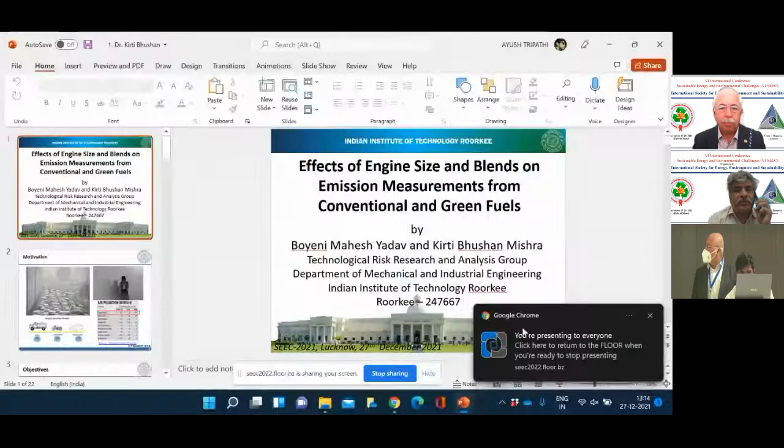I hope I am audible to all of you. I hope I am audible to all of you.

Okay, so this is the way I usually deliver my lectures at IIT Roorkee. Students always say that I have a good voice to present lectures without any microphone, so I'm following the same technique here. First of all, thanks a lot for having me here. This is the third time I'm participating in this prestigious conference.

And the work which I'm going to present today will be a sequel to the earlier presentations. Those who were present in the last two conferences can recall that the work we are doing is focusing mainly on what happens when we use conventional as well as green fuels with some blends, and observe their performance and emission parameters in a laboratory scale engine and in a realistic size engine.

So until last year, we were able to perform some experiments with these fuel blends at our laboratory in IIT Roorkee, which has a small engine. This year only, one of my MTech students, Boyeni Mahesh Yadav, took this initiative and went to a company where we have a larger size engine, and there we tested the same fuel blends.

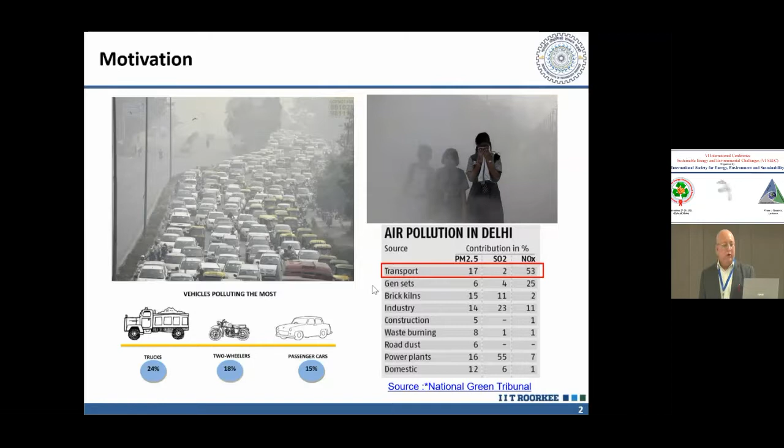The fuel blends which we have chosen belong to conventional fuels like diesel and green fuels like biodiesel, ethanol, methanol, and at least one cetane improver.

The objective is very clear: we want to reduce emission without compromising efficiency. So what we foresee is that these fuel blends can be immediately utilized in the existing vehicles present on road, and they can also be seen as one of the possible alternative fuels in process industries.

So here what we see is typical kinds of biodiesel. The feedstock were listed in the earlier presentation also, and here we have maintained that uniformity, took waste cooking oil as our main biodiesel fuel, together with ethanol and methanol, and one of the cetane improvers. We picked up DTBP as one of the cetane improvers, and we varied the contents the same way as in our laboratory scale.

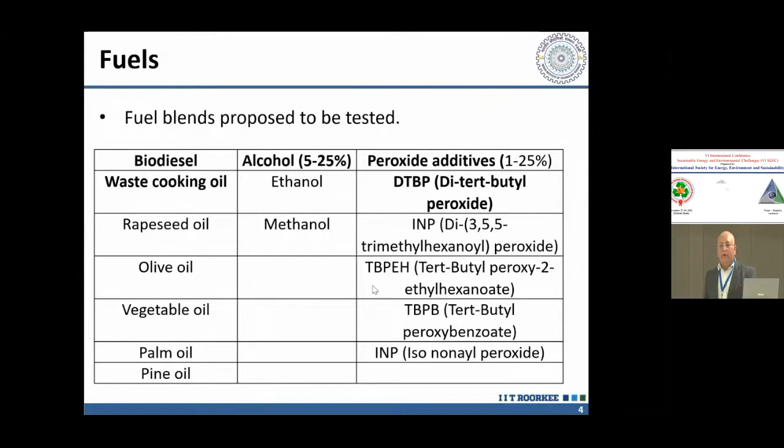So why does engine size matter? This is a three-wheeler having a capacity of 5 kilowatt. This is an all-terrain vehicle having a capacity of 15 kilowatt, a tractor with 25, and a small goods carrier which has a capacity of about 60 kilowatt.

So when we look at the laboratory scale engine, this is something like this. What we did in the present work is extend our testing up to this range of engine capacity, 15 kilowatt. This is a schematic of the laboratory scale engine, which has a capacity of 4 kilowatt, single cylinder, 611 cc.

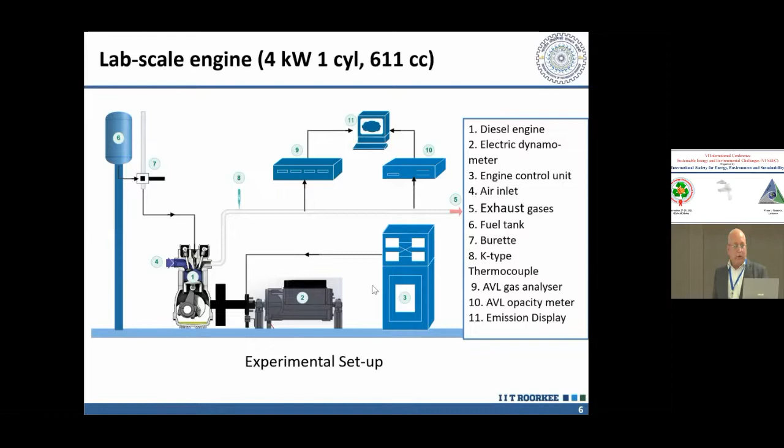This is just a recap of what we did earlier. We measured NOx, CO, and smoke characteristics in the laboratory size engine. What we found out is that the ternary blend, having biodiesel at 93.2%, DTBP 1.8%, and ethanol 5%, gives us the best results, comprising 6.3% NOx reduction, 52.4% CO reduction, 49.2% hydrocarbon reduction, and 45% smoke reduction.

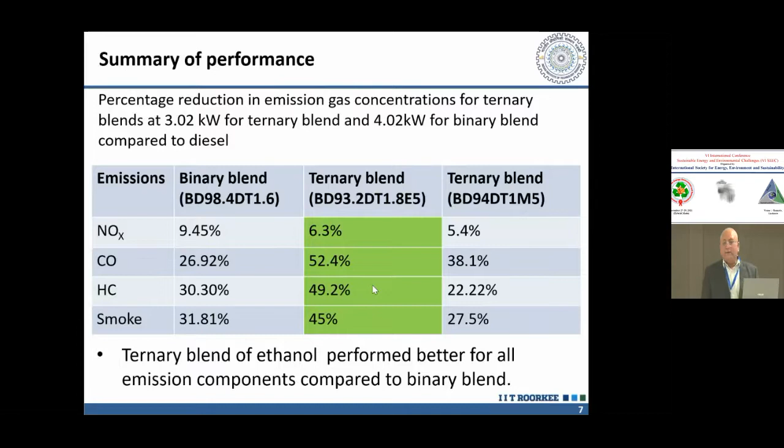So we targeted testing these fuel blends in a heavy size engine to see what comes out. We contacted one of the companies located in Pune, Apex Innovation, and they have a 22 kilowatt double cylinder turbocharged engine where we tested our fuels.

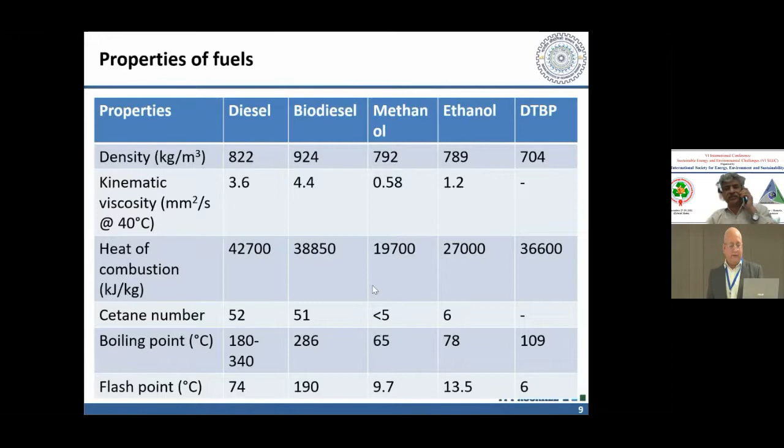This is our cetane improver, DTBP, which has a chemical structure something like this. We want to improve the cetane numbers of diesel and biodiesel by adding a small quantity of DTBP together with ethanol or methanol. This particular peroxide has very nice burning characteristics. It has a symmetric chemical structure, and when you burn it, it burns at a higher rate, produces less smoke, and shows a kind of transparent flame. This can help us improve the cetane characteristics of diesel and biodiesel.

Over the years, we have learned that burning biodiesel in engines produces more NOx than diesel fuel. So when we are targeting at least 5% biodiesel to be added in existing engines by 2030, we have to look at what happens when we increase the quantity beyond 5% and see how these fuel blends are performing.

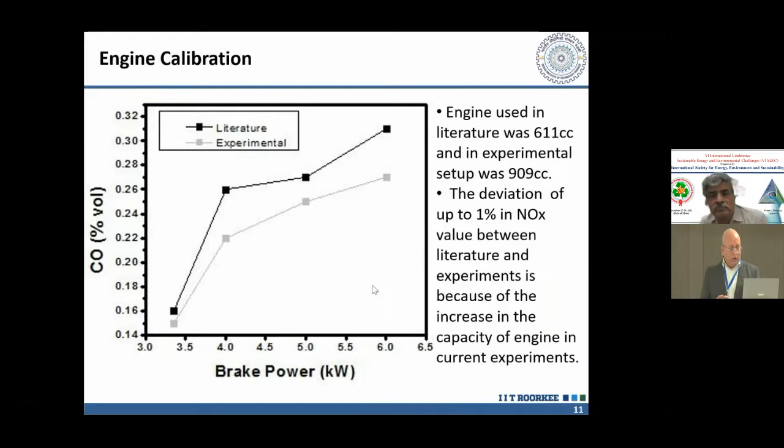So we started with engine calibration. We compared the experimental results obtained from small scale tests and then large scale tests. What we saw was we have a deviation, but it is acceptable because large scale experiments can also go with the scale. This is the result for carbon monoxide, and at the same time we measured NOx emission for these two engine sizes, and biodiesel in both cases emits more NOx than diesel fuel.

So we wanted to test biodiesel alone in the largest scale engine, but we had some problems. After a certain time period of some minutes, the engine stopped. We took out the injector and saw that it was clogged. So we decided not to go with 100% biodiesel, and decreased the quantity to 50%, then saw how the blends were performing.

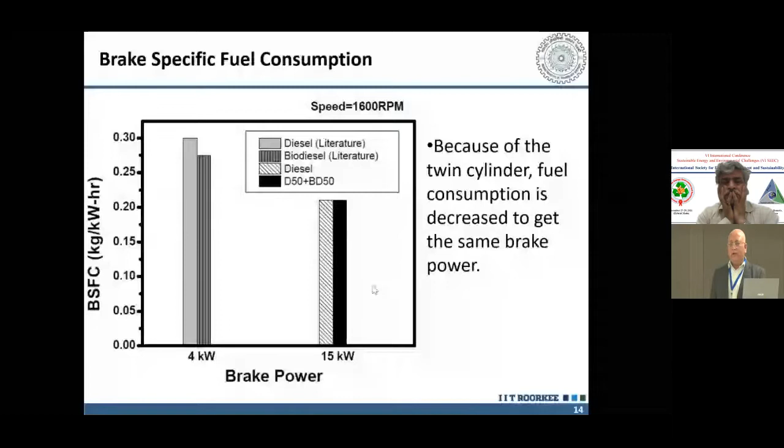In all these experiments, we maintained the RPM at 1600 and tested different fuel blends. In the 15 kilowatt engine, both diesel and diesel-plus-biodiesel at 50-50 are producing the same brake-specific fuel consumption. That means there is no change in the fuel quantity required to produce a certain power.

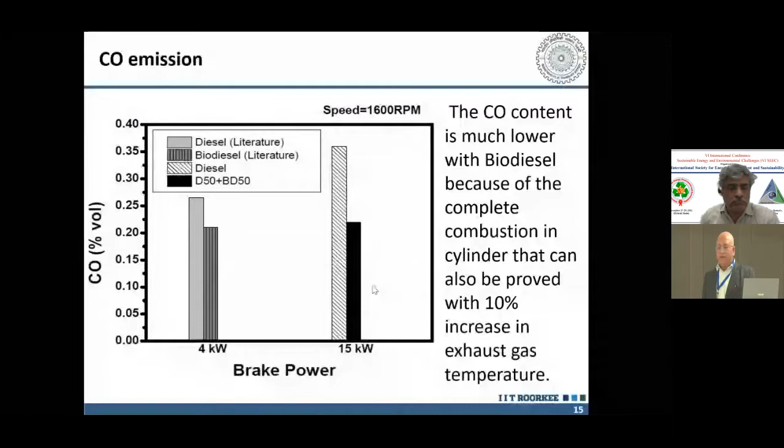If you look at carbon monoxide emission, diesel has much higher emissions, but the mixture of diesel and biodiesel shows a drastic reduction in CO emission. With 50-50% biodiesel and diesel, we got higher efficiency than diesel alone. This indicates we can use a 50-50 blend of diesel and biodiesel, provided that much biodiesel is available in the country. Once we perform this test, we get to know whether there is decrement in efficiency or enhancement of emissions. Small scale experiments may not provide all those answers, so it is necessary to scale it up.

Now let me show you some of the results of fuel blends. What you can see here is different fuel blends, starting from diesel alone, biodiesel alone, and then biodiesel DTPP, biodiesel DTPP plus ethanol, diesel alone, and the same thing with 50-50 proportions. So we maintained the 50-50 proportion of diesel and biodiesel and included ethanol and one cetane improver, that is DTP.

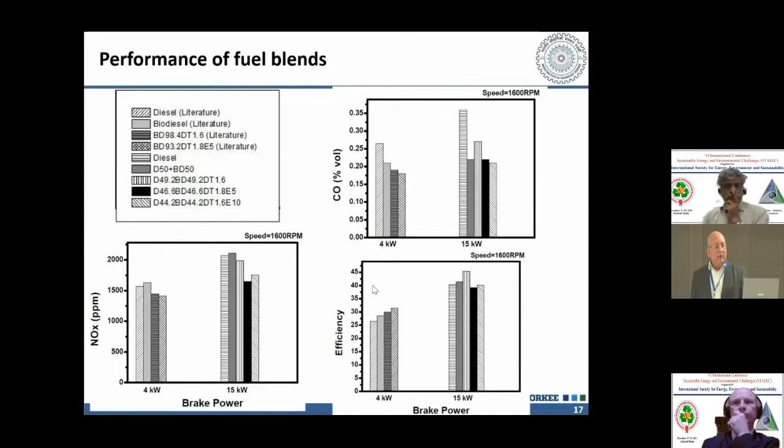What we observed was that in all cases, the emissions, CO, NOx, and efficiency showed excellent results when we used these fuel blends. So the laboratory scale results were reproduced in moderate size engine tests also. This fuel blend with 5% ethanol and some percentage of DTPP reduced CO and NOx up to a great extent.

However, we got a little bit of increase in fuel consumption with this blend, but looking at the rest of the advantages, this can be thought of as: yes, we have to put in a little bit more fuel than what is required for other fuels with higher levels of emission.

So, 46.6% diesel, 46.6% biodiesel, and DTPP and ethanol in small quantities produced a reduction in NOx, CO, and smoke up to a level of 20 to 50%. This is what we wanted to make sure of - whether the engines which are present on roads can also produce the same outcomes or not.

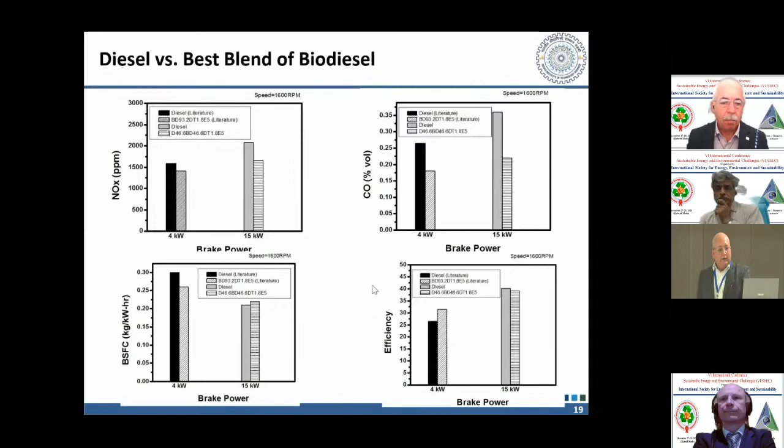What you can see here is the comparison between diesel fuel and the best blend of biodiesel. In case of all emissions, including efficiency, we found excellent results, and this reduction in NOx emission, CO emission, and smoke have encouraged us to build some confidence in the tested fuel blends.

So what I have tried to discuss with you is how scale affects the results from different engines. The range is not too wide - we went from 4 to 15 kilowatt only, but this gives us a little bit of higher confidence that these fuel blends will perform in a similar fashion as in the laboratory scale engine.

We had some problems starting the engine, as I mentioned in the beginning, so we reduced the biodiesel content up to 50% and the rest were diesel plus other blends. The best blend we found was close to 46.6% diesel and biodiesel together with 5% ethanol and 1.8% DTP, which led to a reduction of NOx, CO and smoke from 20 to 49%.

So these kinds of studies are necessary in order to connect the small scale experiments with the large scale experiments, so that we have a better scientific background to extrapolate the results and give a little more confidence in saying that yes, the fuel blends are really performing well in real size engines also.

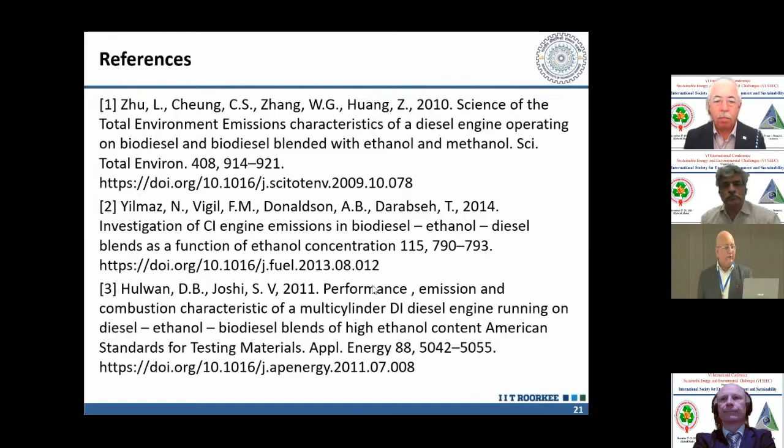So with this, I have come to the end of my talk. These are the references that I have picked up for this study. Thank you very much for your kind attention.

So thanks for starting the session with engine utilization and highlighting the associated challenges. Now we will move on to the production aspect of biodiesel and other liquid fuels. I will request Professor Sharma to introduce Professor Yogesh Sir.

Thank you, Dr. Atul. So the next panelist for this session is Professor Yogesh Sharma. He is a professor in the Department of Chemistry at the Indian Institute of Technology, BHU, Varanasi. Professor Sharma finished his PhD from the Department of Applied Chemistry, Institute of Technology, Banaras Hindu University, Varanasi, in 1991. Currently, he is working as a full professor in the Department of Chemistry, IIT BHU. His research interests include renewable energy and biofuels, development and characterization of heterogeneous catalysts, synthesis of nanoadsorbents, river health science, and monitoring of the river Ganga. Professor Sharma is a celebrated researcher in renewable fuels and sustainability with more than 12,000 citations. So I request Professor Sharma to give his presentation, as mentioned by Professor Atul, on the production aspects of biodiesel and alcohols. Over to you, Professor Yogesh Sharma.

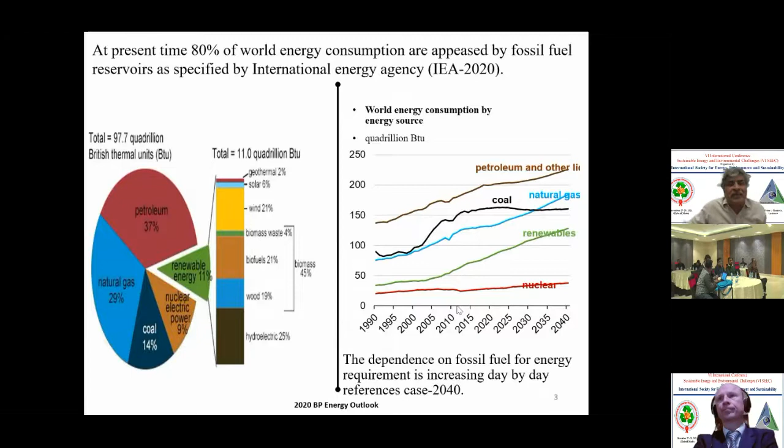If you look at this slide, it presents the world energy consumption, and we can see how world energy consumption is increasing day by day. Can we go for the next slide, please?

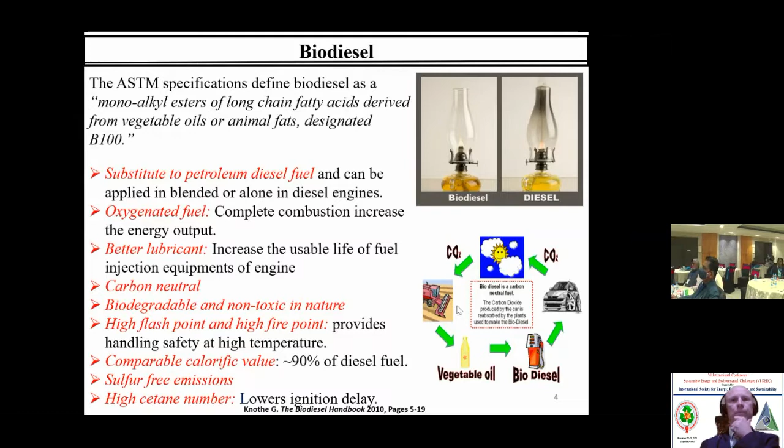If you go to the second generation feedstock materials, we find that we focused on non-edible oils - non-edible feedstock. So jatropha oil, kusum oil, madhuca, and several other non-edible feedstocks where we can focus on biodiesel production. But then if I find which could be the best feedstock material, I certainly focus on waste frying oil, waste cooking oil, or waste fat from animals. But then they also have limited availability.

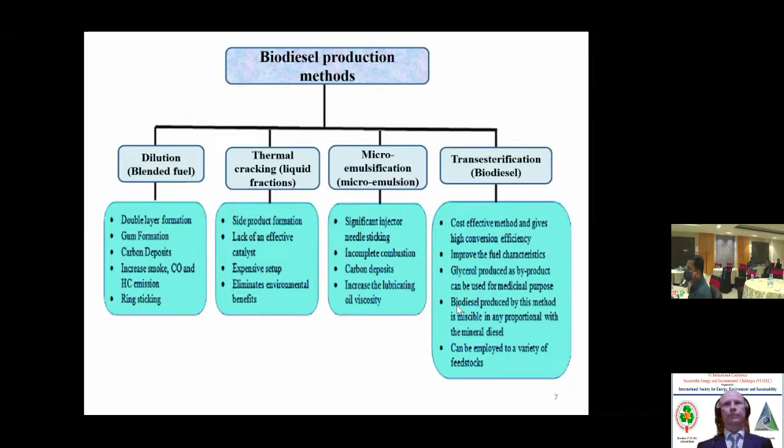Can we go for the next slide, please?

India biodiesel history: the Government of India launched a national policy on biofuel in 2018. We had a national biodiesel policy in 2012, and the latest biofuels policy in 2018. It sets a target to blend diesel with B5 by 2030.

In 2021, the national average blend rate is estimated to be 0.09%. I recall Professor Mishra was talking about 5% blending. Well, it is possible, but it's tough in the sense that its availability is limited.

So, can we go for the next slide, please?

Comparison of emissions—Professor Mishra's talk was crisp and well organized. He touched on this, and I also got some data on this area. We are working on this particular area as well: comparison of emission impacts of biodiesel and diesel in compression ignition engines.

So we can see the comparison of what B20 gives us, and what B100, that is pure biodiesel, gives us. We find that it is quite comparable, quite comparable. Can we go for the next slide, please?

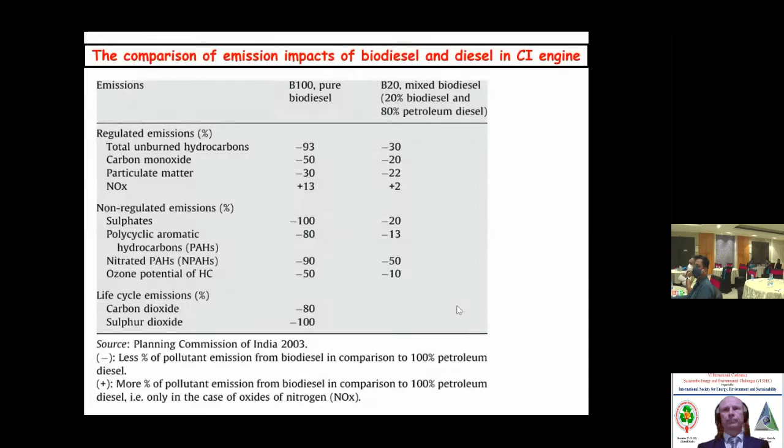Comparison of physico-chemical properties of biodiesel and diesel fuel. This again is very important. We can see column number 2 and 3, and we find it absolutely compatible, very much compatible.

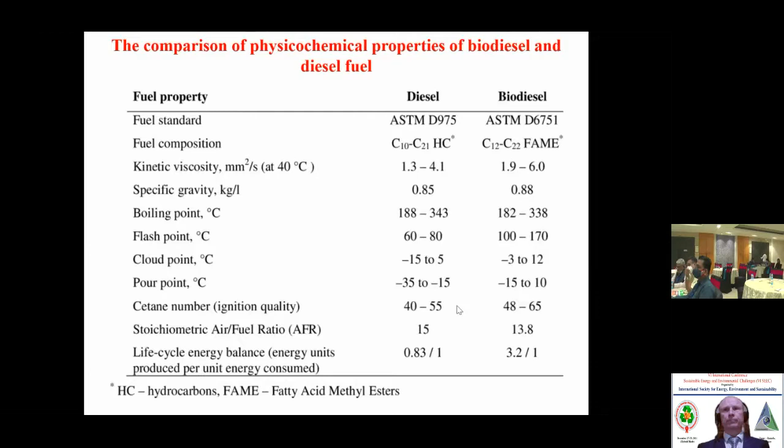Can we go for the next slide please? This is the last slide of today's talk. It is basically not biodiesel disadvantages, it is more like research opportunities—research areas as far as biodiesel is concerned. So these are areas where we can work.

Variation in quality comes from various things—it comes from the application of a particular feedstock material. If we go for a very high quality feedstock, we get a better product. So here we can work on how to improve the quality of biodiesel produced from the lowest grade feedstock material. It's not suitable for use in low temperatures because its flow is affected.

Food storage is made from animal and vegetable fat. Increased use of fertilizers. Clogging in engines, no. Regional suitability, strategy, monoculture, and a slight increase in nitrogen oxide. It is a renewable fuel, but its application results in a net decrease of energy, and an increase in nitrogen oxide emission.

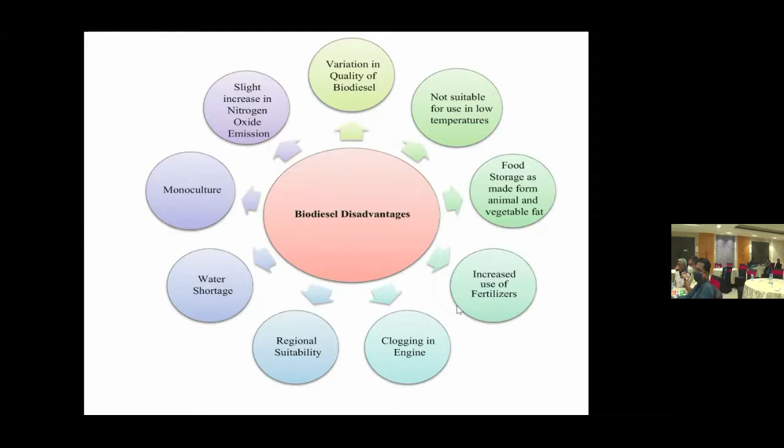So, my dear friends, thank you very much for inviting me for this talk. And if there are any queries, I am ready to take them.

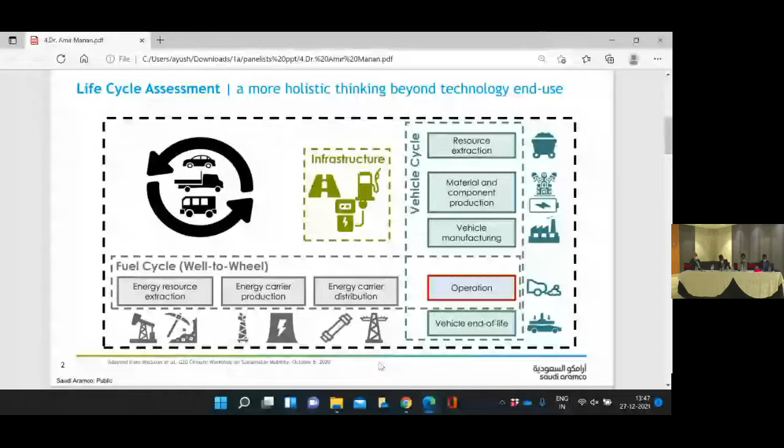So a life cycle assessment is basically a technique that offers a more holistic way of thinking for us to compare technologies, different fuels, and energy types. Now that we have that as the way of thinking about how we assess technologies and fuels, I'll give you some examples of the work that we've done in the last couple of years. So if you move to the next slide, please.

Okay, so this is a recent piece of work that we did for China, where we compared the greenhouse gas emissions of conventional engines, hybrids, and electric vehicles. Now China, just like India, is a huge subcontinent. Each province, each state will have its own power generation, and therefore the power generation can differ from one region to another. So we decided to look at the greenhouse gas savings that you get with electric vehicles in China by province.

You'll see that the regions in red are basically where hybrid electric vehicles emit less CO2, whereas the regions in blue are regions where electric vehicles have got lower emissions. Now the blue regions, for example in Tibet, Yunnan, and Sichuan, these are regions where the electricity is mainly from hydroelectric. Whereas in places like Beijing, Inner Mongolia, Shandong, these are regions that are still heavily reliant on coal.

So in these regions, it makes more sense to have hybrid vehicles with different battery sizes as an opportunity to decarbonize the passenger transport sector. Now, moving to the next slide.

Now, the other way of looking at it is that there is really no technology silver bullet. If you look at this plot, you'll see that there are opportunities to combine hybrids with advanced combustion engines. So here, what we did was we looked at combining hybrids with a GCI engine, a gasoline compression ignition engine, running on GCI fuel.

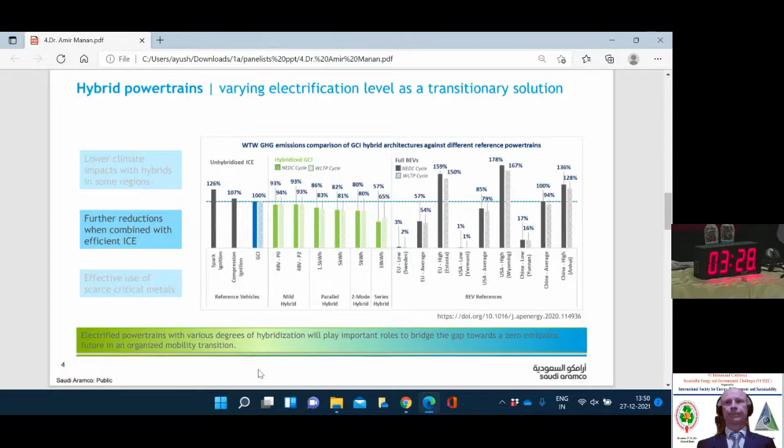So the key here is to basically highlight that there is no technology silver bullet. You have to look at it throughout the entire life cycle. There are opportunities with the use of low carbon fuels, as well as combining it with efficient engines.

Now, the other thing, when thinking about hybridization or even electric vehicles, we have to start thinking about the critical metals. So if you move to the next slide, one of the ways of looking at it is, how do we ensure the best use of scarce critical metals?

Today about 70% of lithium is produced in Chile and Australia. About 60 to 70% of cobalt is produced in Congo and Australia. And about 70% of graphite is produced in China and Brazil. So there are concerns about the accessibility and sustainability of production of battery materials.

So the question then is, for emerging countries like India, Indonesia, or Africa, what are the solutions moving forward? Do we want to compete with all the other superpowers trying to get access to the limited supply of sustainable critical metals? So what is the best use, given the limitations that we have, of every kilogram of lithium or every kilogram of cobalt? This is one way of looking at it.

Now this is not a full life cycle analysis, but a well-to-wheel analysis, meaning we don't account for vehicle manufacturing emissions, only fuel cycle emissions. For mild hybrids, the smaller battery sizes give more effective use in terms of well-to-wheel CO2 reductions per kilogram of lithium. But as you increase the battery size, you have diminishing returns with every kilowatt-hour increase of battery size. I'm moving quite fast because I think we should spend more time on the panel discussion, so I'll move on to the next slide.

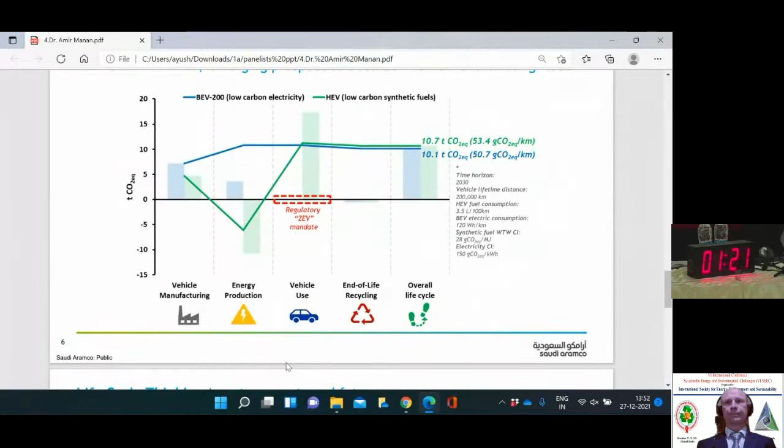So here I'd like to show the opportunity for the use of low carbon fuels. In this case, we have the production of synthetic electrofuels, where CO2 is captured directly from air, combined with low carbon hydrogen produced from renewable electricity with a carbon intensity of about 150 grams CO2 per kilowatt hour. We compare that against an electric vehicle running on similar low carbon electricity.

First point to note is that none of these vehicles are zero emissions on a life cycle basis. However, both technologies can enable near zero emissions on a per kilometer basis. All of this depends on how the electricity is produced, or how the low carbon fuels are produced.

In the case of battery electric vehicles, most of the emissions happen throughout the production of the vehicle, but also the electricity production. Whereas in the case of low carbon synthetic electrofuels, the emissions are basically during vehicle use. However, because the CO2 is being captured from air, you have net negative emissions during the production of the fuels. But overall, on a life cycle basis, they are comparable.

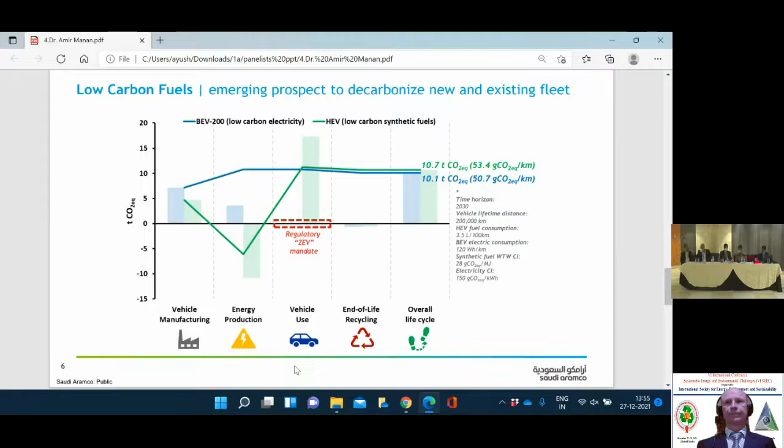And with that, final slide. Thank you very much. I hope I've kept within time.

So thank you, Dr. Amir, for enlightening us about life cycle thinking and giving us various objective ways of comparing electric vehicles, hybrid electric, and other fuels. I'm sure we will have various questions from the audience at the end. So now we will move on to Professor Frank Winter, who will discuss various futuristic fourth generation fuels and their production methods.

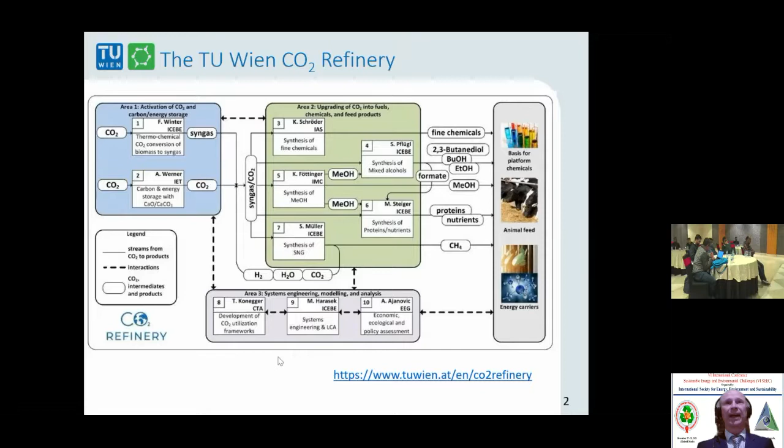So this is what we do here in the CO2 refinery: look at the different conversion routes, study efficiencies, and do a life cycle analysis and economic, ecological, and policy assessment.

Next slide, please. Here you see an overview of the different topics and also the key researchers, the PhDs who work in this area. And you also have this link, the website...

...where you will find more information and updated information in the next years, because it has been recently started this year, and it will be in full speed now, and we are looking forward to new results. Please meet us at the CO2 refinery website we have installed.

Next slide, please. Here we focus on power to green methanol synthesis, and we do a detailed analysis of the mass flows, energy flows, balancing, and test virtually different catalysts and guidelines for operation.

The main idea is to convert CO2 with hydrogen into methanol. Hydrogen, of course, is also a key issue for using CO2, because CO2 can be a wonderful carbon source. However, hydrogen is also very important as a hydrogen source we need for e-fuels. You see here, CO2 and 3 hydrogen is necessary, 3 moles of hydrogen.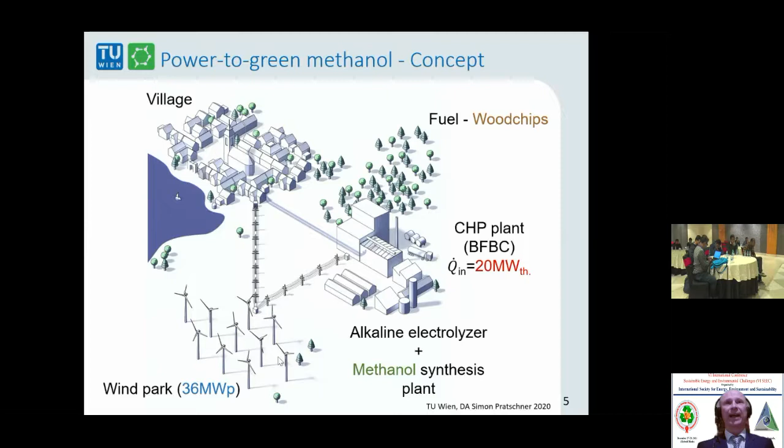You use renewable power from the wind park, for instance, for the electrolyzer. Here we have about 16 megawatts electric. And we need some more oxygen, so therefore there's this ASU, air separation unit, to produce the additional oxygen we need. The feedstocks are wood chips, air, and water. The products are mainly methanol, and some flue gas as well.

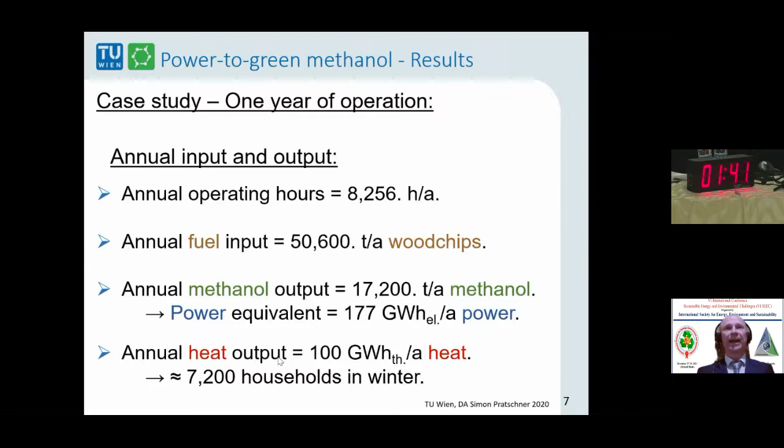This gives an annual methanol output of about 17,000 tons per year, with a power equivalent of 177 gigawatt hours per year electric. The annual heat output, also very important for us in Austria for heating purposes, is 100 gigawatt hours per year. This is about 7,200 households that can be supplied in winter time, which can be quite cold here in Austria. So this is the case study, as you have seen the picture before.

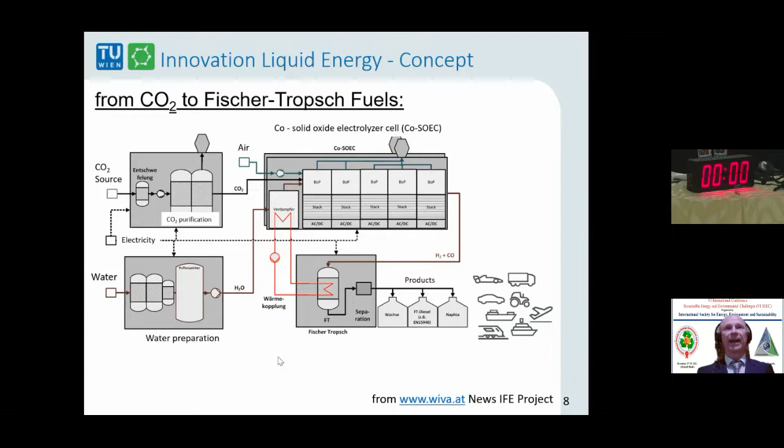There's also a homepage you can visit, it's wiva.at, and you see this Innovation Liquid Energy project we work on. Next slide, please. So this is the end of my presentation, and I look forward to discussion in the panel discussion. Thank you very much.

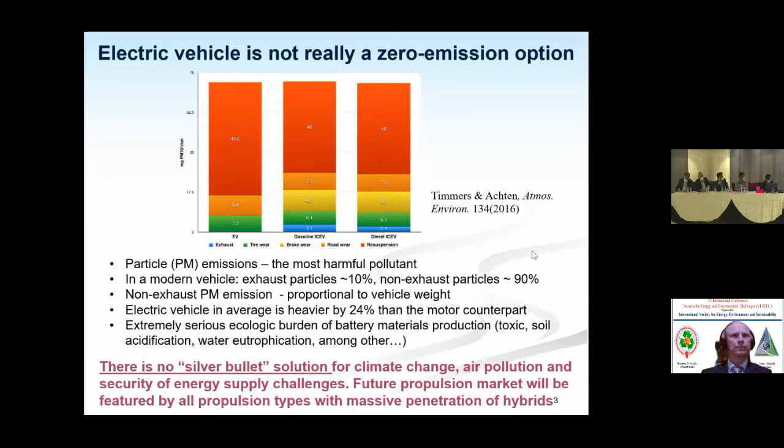Next slide, please. And if we take this into account, alternative fuels like hydrogen, which is a truly carbon-free fuel, could be a wonderful alternative. Indeed, hydrogen is featured by extremely wide flammability limits and extremely high burning velocity. Just to give you a number, the burning velocity of hydrogen is more than 7 times higher compared to that of gasoline, which brings the combustion of hydrogen much closer to the theoretical Otto cycle, which is the most efficient one.

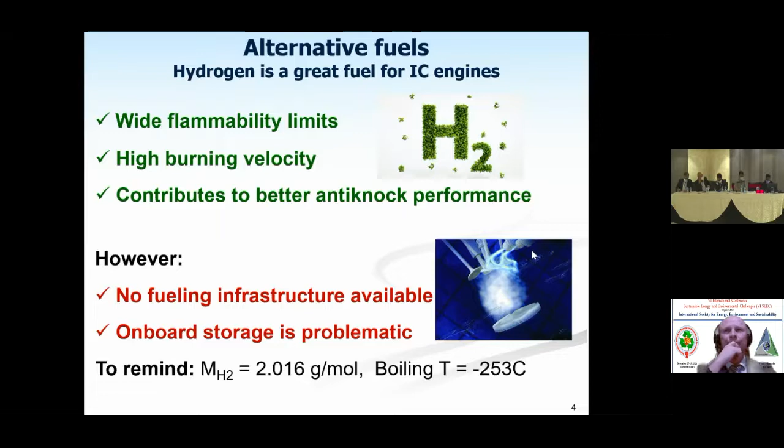But if we talk about hydrogen vehicles with a need to fuel by hydrogen, there are major obstacles we are facing. First is the non-availability of fueling infrastructure. The second, which is not less serious, is hydrogen onboard storage. To understand this, take a look at this number: hydrogen boils only at 20 Kelvin, minus 253 Celsius. This says everything.

Please, next slide. In such a case, the onboard production of hydrogen, instead of keeping it on board, could be a wonderful alternative. This can be done by waste heat recovery through a process called thermochemical recuperation, meaning we use the heat of exhaust gas or other heat sources.

We fuel the platform by a liquid fuel, for example, as Professor Winter reported, by methanol, which is an excellent electrofuel. The methanol can be reformed using waste heat through an endothermic reaction, exactly the opposite reaction to what Professor Winter showed you already. So we have methanol, we add some water, we add some heat, and what we receive is 3 moles of hydrogen and 1 mole of CO2.

So this shows you how our world is a circular one. Professor Winter reported how to use CO2 and hydrogen to receive methanol, and I'm talking to you about how to use this methanol to produce, in the opposite manner, hydrogen and to combust the hydrogen. Next slide, please.

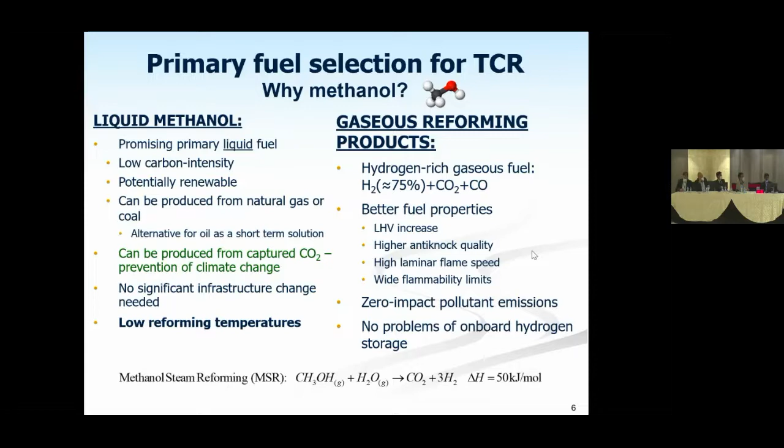This is what we heard already from the previous speakers: methanol is an excellent electrofuel. Next slide, please.

Now I will show you very briefly, because of the shortage in time, possible reforming techniques. Each technique could be the best solution for different primary fuels. For example, if we talk about steam reforming, you see here the example: when we use liquid fuel and water, no oxygen, we produce a lot of hydrogen. This technique is well suited for alcohols, for example. Next slide, please.

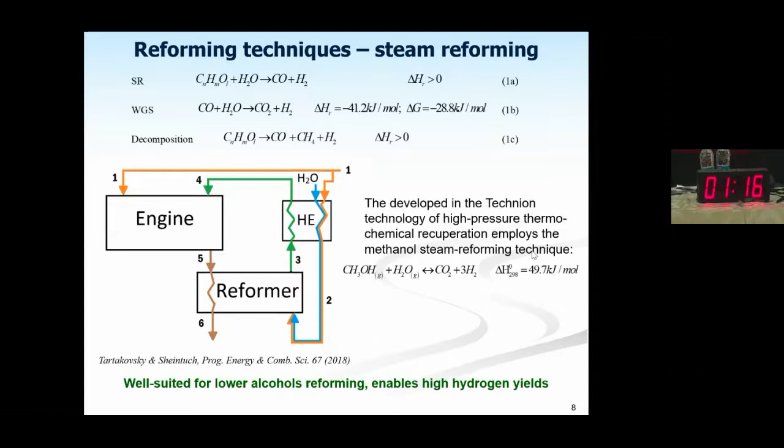Autothermal reforming is well suited for the reforming of gasoline or methane because it uses some oxygen to provide additional heat. Next slide.

Exhaust gas reforming is also well suited for heavy fuels reforming, and it uses one more reaction with CO2, so-called dry reforming. In such a case, exhaust gas is simply added into the reaction.

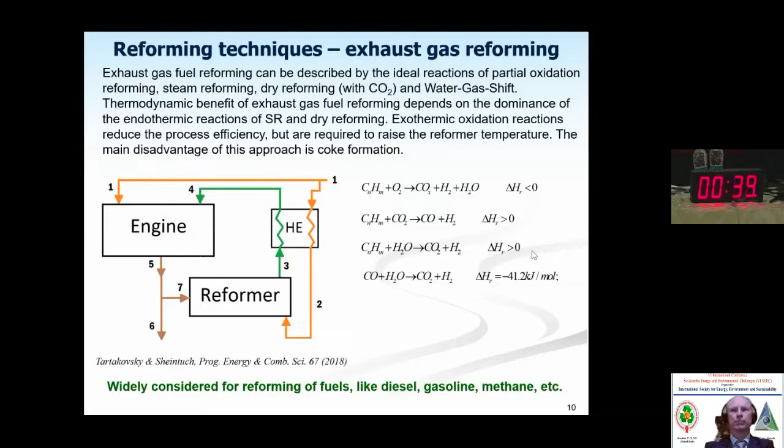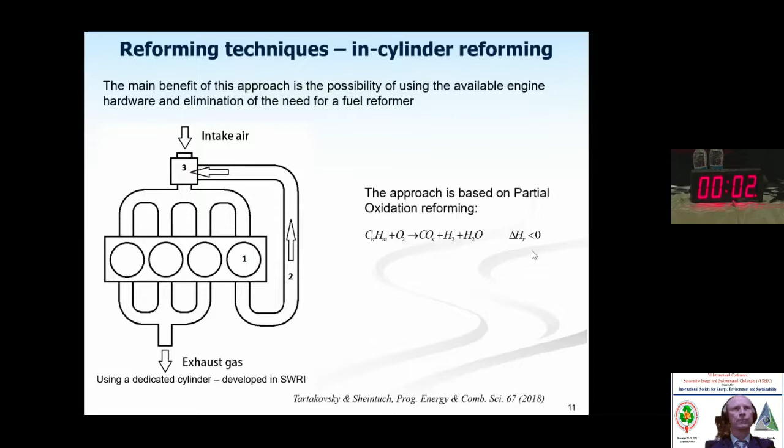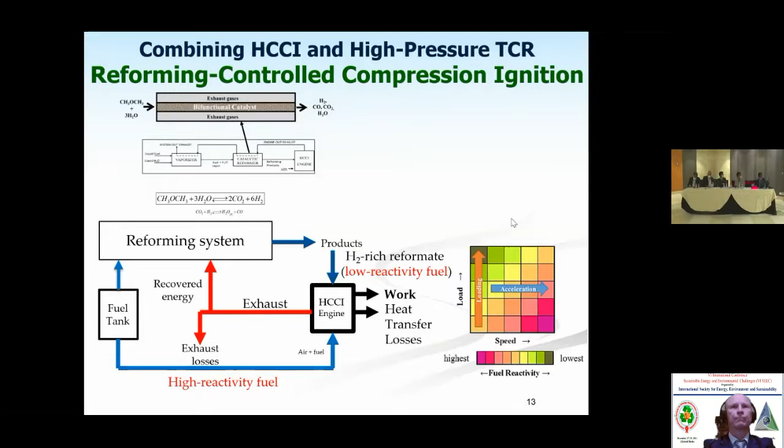And this is the revolutionary technology that we have developed at the Technion. We call it high pressure thermochemical recuperation. This is the only technology that allows us to combust hydrogen as a standalone fuel.

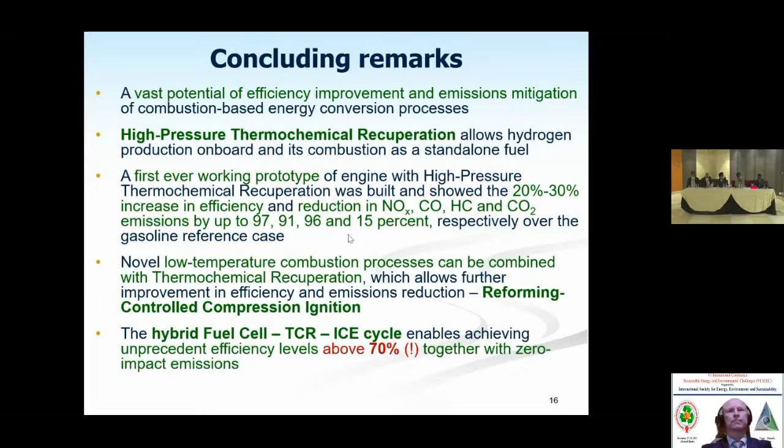And this is the last one, and the conclusion: we can use thermochemical recuperation to produce hydrogen on board. We can achieve great advantages in terms of efficiency, between 20 to 30% improvement, dramatic reduction in pollutant emissions, and we also talk about 70% efficiency if we combine this cycle with a fuel cell. Thank you very much.

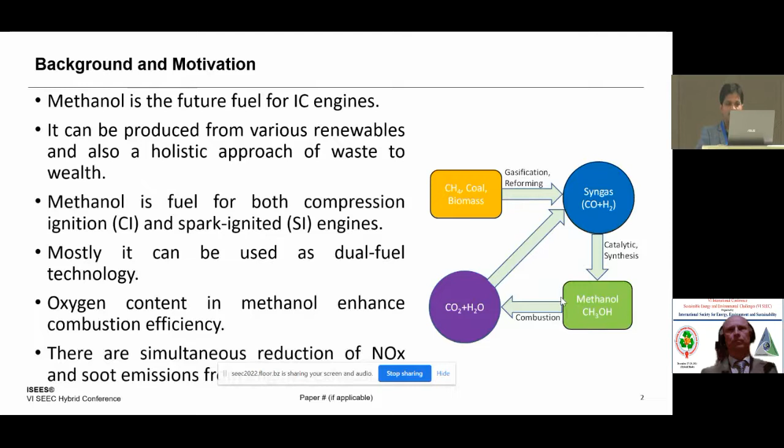Methanol can be produced from various renewable resources, such as coal, biomass, syngas, and CO2 from the atmosphere, which can be converted through specific reactions to methanol, usable in IC engines, in both SI and CI engines, and in dual fuel technology. The minimal oxygen content is good for conversion, and methanol can reduce NOx and soot simultaneously.

For the application of methanol in a genset engine, we modified the existing ECU to an open, programmable type, and then modified the inlet manifold. We used separate methanol injection in the port, and we also used turbocharged air to heat the methanol injected in the inlet manifold.

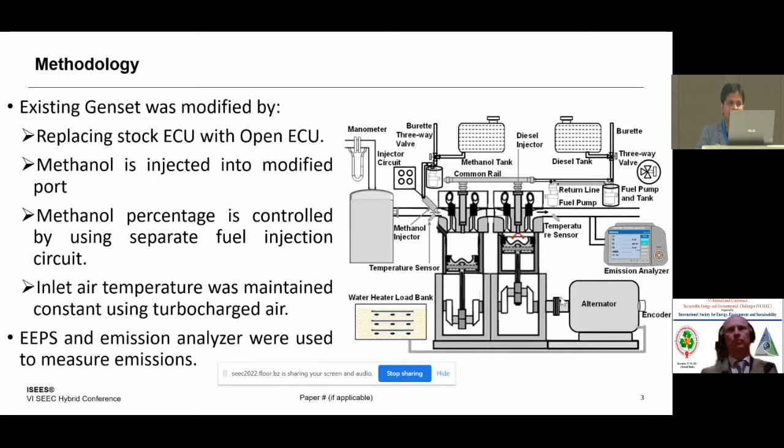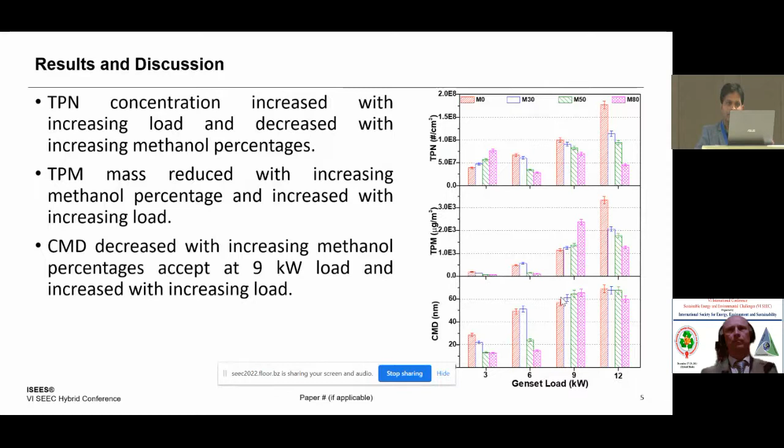30% and 50% methanol application in the engine is much better compared to 80%, because a higher percentage of methanol will not combust completely. So we have observed that 50% methanol replacement is much better than other percentages of methanol. Thank you.

Thank you, Vikram. Any question for Vikram? Yes. So you talked about how much percentage of methanol in your engine? We have replaced maximum 80%. Maximum 80%. What happens to the performance?

Performance at 80% is lower compared to conventional diesel. Should it be lower for all percentages of blends? No, up to 50% the performance is much higher. Near 30%, it's about 8% higher.

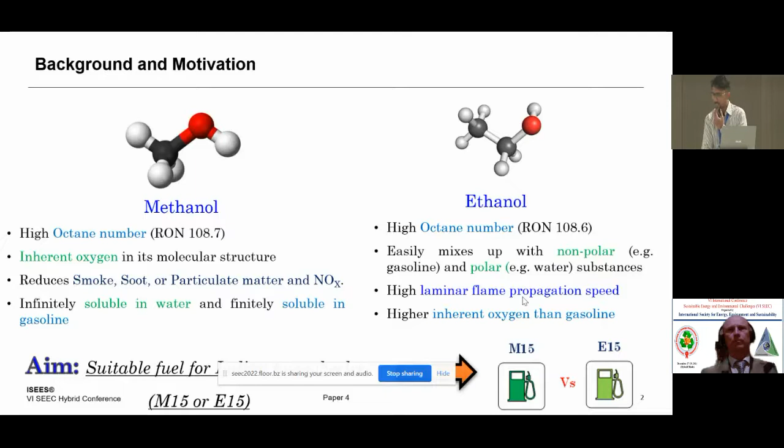To assess the suitability of the fuel, the vehicle was tested. The vehicle used was a two-wheeler, 125cc, and the fuels used were G100, M15 and E15. For M15, as per IOCL specifications, 3% isopropyl alcohol was used to avoid fuel separation, and the entire vehicle was tested on the chassis dynamometer.

This is the setup used in the wheels for testing the vehicle to meet vehicle norms. The gear position was followed as per OEM recommendation, and road load simulation as well as wide open throttle conditions were tested on this chassis dynamometer setup.

Coming to the results of road load testing: for M15 and E15, due to over leaning conditions, we observed that CO was reduced as well as CO2 was reduced. The question arises why inherent oxygen is not able to enhance the CO to CO2 reaction, because in RLS testing O2 was coming out at the tailpipe.

We are saying that inherent oxygen, due to the throttling process, is sometimes not participating in combustion and is coming out at the tailpipe. This was the main conclusion from RLS testing, and NOx was reduced for both M15 and E15.

Regarding fuel consumption, methanol and ethanol both have higher energy of vaporization. After reaching some speed, they behave like gasoline and produce less hydrocarbon than gasoline. Regarding power at wheels, we observed that M15 and E15 both give higher power at wheels than gasoline.

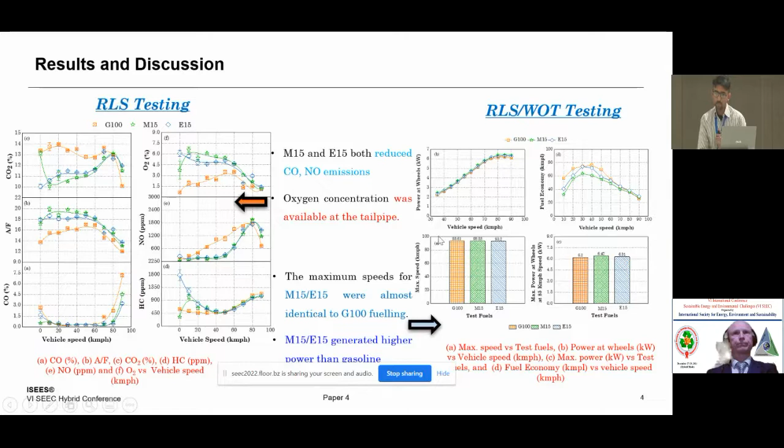The max power at wheels was higher in case of M15 compared to G100 as well as E15. The maximum speed for M15 and E15 was comparable to G100. Now coming to the WOT testing.

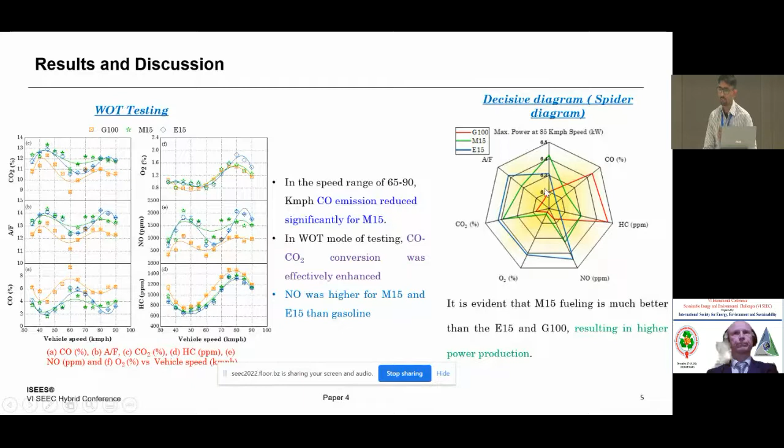Coming to the decisive diagram: we can see that max power at wheels was higher as well as max speed was higher, so M15 is found to be a suitable fuel compared to E15. This study is based on the sustainability point of view. Regarding economic as well as scalability, M15 gives advantages over E15. Thank you.

Quite interesting work. Could you please make some comments on the effect of dilution on different engine components when you blend a higher proportion of methanol and ethanol?

Dilution in the sense, what happens with the combustion? Because it's not about running the engine for half an hour, it's about running the engine for a few years. Yes, this study is to test vehicle performance and emission. Regarding dilution, we have to do field trials and everything, but this is not concluded in this investigation.

Could you please think of how we can assess this dilution effect inside the engine cylinder? Dilution effect, you're talking about durability or dilution? I don't understand. It's about the water vapor that forms, so if water condensation during combustion.

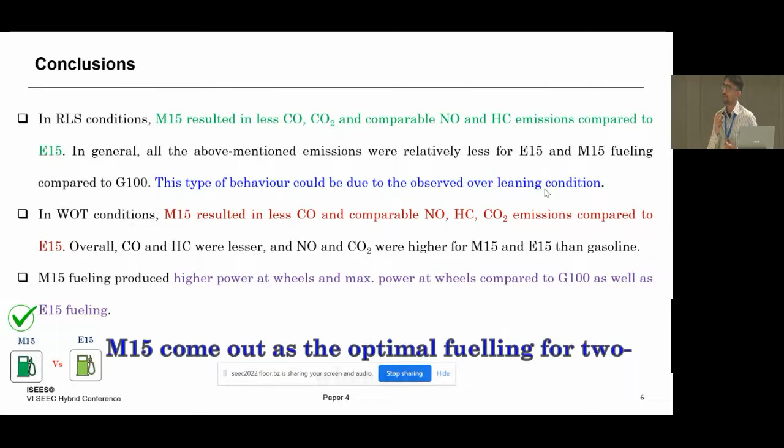Okay, so in methanol M15 the dilution H2O is higher. So actually H2O formation is coming, but H2O is coming from the silencer down. So basically, if dilution is coming, H2O is coming, then it is good for any fuel, whether M15 or E15, because we need that H2O to come out. Okay, thank you.

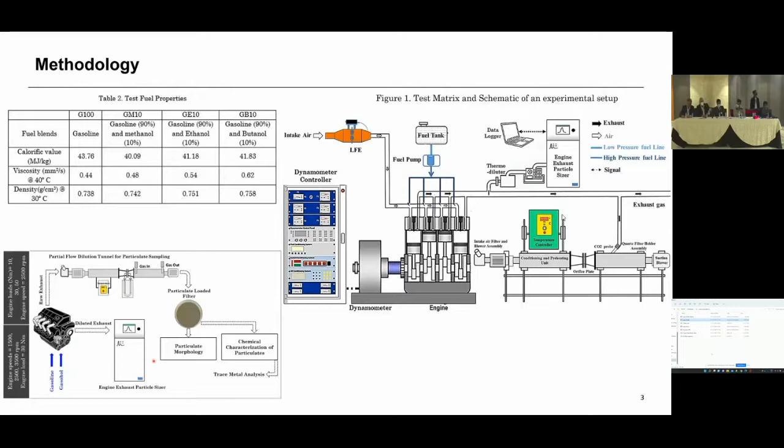However, no further increment was observed at high load. At all engine loads, gasoline-alcohol blends indicated relatively lower particulate emissions than baseline gasoline.

This is due to the presence of fuel-bound oxygen in the case of blends. Enhanced alcoholized fuel-air mixture leads to superior combustion and rapid soot oxidation, resulting in lower particulate emissions.

The lowest particulate number concentration was shown by GM10 at lower engine load. However, GM10 also showed the lowest particulate number at medium to high load.

Among the different blends, the GB10 fuel engine exhibited somewhat higher particulates. AMP contribution was almost the same for all gasoline-alcohol blends.

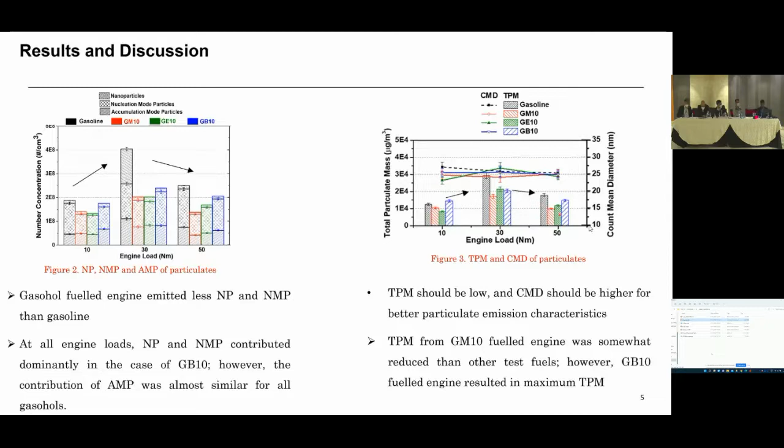So physical characterization showed lower number concentration for gasoline-alcohol blends among different blends. GM10 showed relatively lower particle number concentration, while GB10 showed the highest particle number concentration.

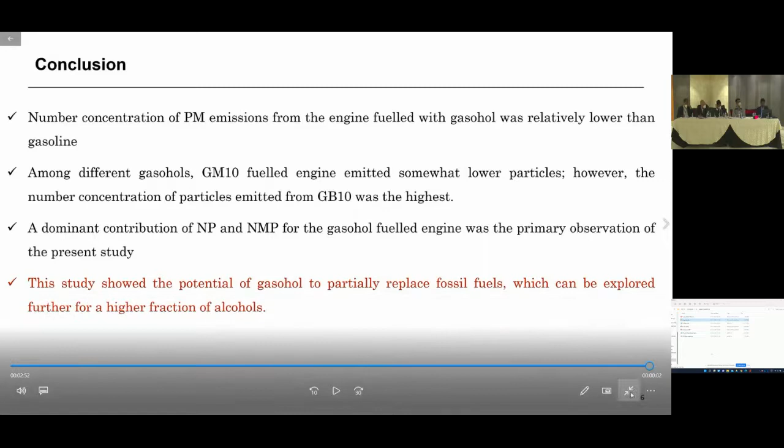Utkarsh, can you comment on why we observe two peaks in the particulate number distribution curves? What is the possible reason? Actually sir, this is the bimodal distribution which is mostly observed in SI engines.

That means the number distribution increases in the fine mode and then decreases, while it starts increasing again in the more coarse particulate mode.

That's a very special curve we can observe. So is there any reason, for any fuel, why the peaks happen at certain points?

So this is the transition point from the nanoparticle to the NMP, and the second one is observed from NMP to AMP. Thank you.

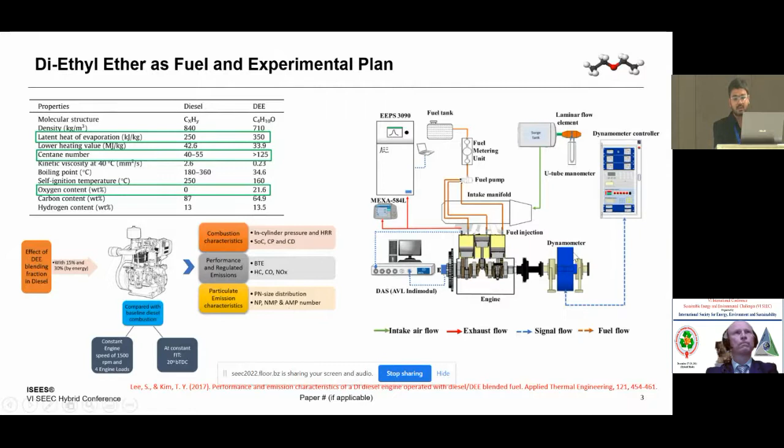We are analyzing the performance of the engine in terms of combustion characteristics, performance characteristics, and regulated emission and particulate emission characteristics. Here it can be seen from the schematic, the different components of the setup.

Discussing the results, if we see the combustion characteristics, we can see that increasing the addition fraction of diethyl ether in diesel actually retarded the combustion. This is not so obvious because diethyl ether has a higher cetane number, which should lead to shorter ignition delay.

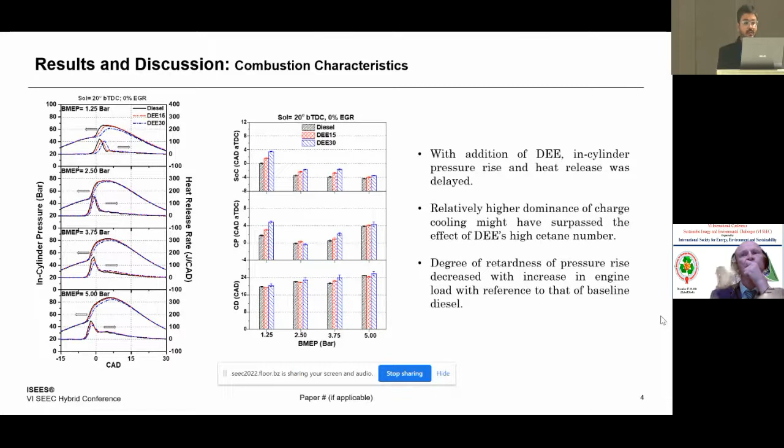But we can see that it is leading to retardation of combustion. This can be because of the high latent heat of vaporization of diethyl ether, which is leading to a cooling effect, hence the combustion is retarding. However, this effect is reduced at higher loads, where it actually resembles the baseline. So combustion-wise, at lower loads it is slightly different, but at higher loads it is actually similar to that of the diesel engine.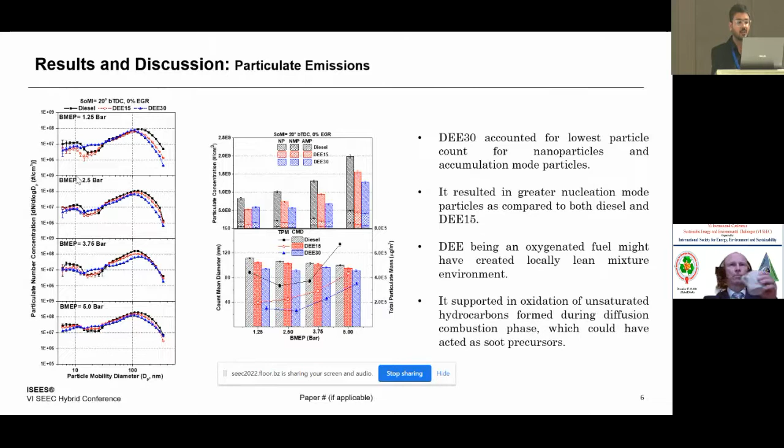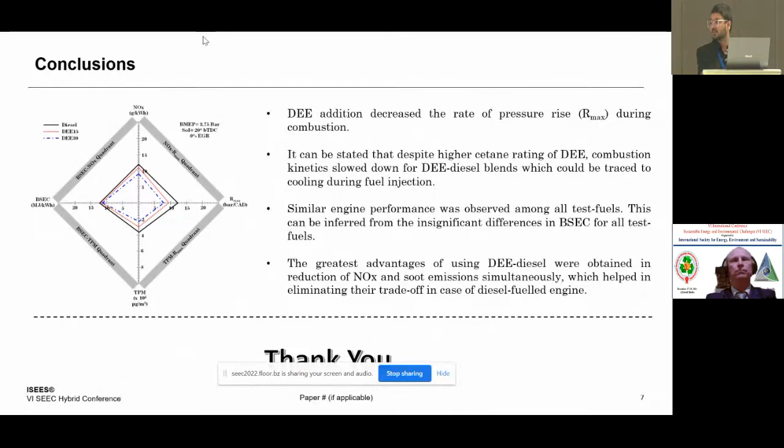Discussing the conclusion, we analyzed 4 parameters: Rmax, the combustion rate, NOx, and TPM, that is the emissions, and brake specific energy consumption, that is the performance. We can see that performance-wise, all 3 fuels are behaving the same. However, we see an advantage on the NOx side and the smoke. So we can suggest that diethyl ether blending at 30% in diesel can lead to good performance in emissions. Thank you.

Good presentation, thank you. What was the motivation for you to restrict yourself to 30% only? Why don't you go ahead more than that 30%?

Yes, actually we have tried some experiments going up to around 45%. But we saw the problem of vapor locking in the fuel supply line and induction line, because it has higher vapor pressure, so chances of vapor formation are very predominant at higher percentages like 45%. So 30% is actually performing well in all load conditions.

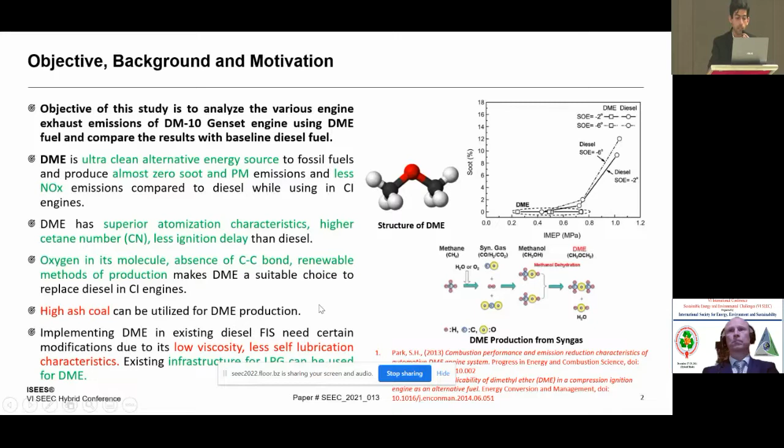High ash coal can be utilized for DME production. But DME has certain limitations, like low viscosity and less lubricating characteristics. However, we can modify the existing fuel injection system to implement DME into the system. We can clearly see in the properties section that the cetane number of DME is significantly higher than diesel, and the latent heat of vaporization is also significantly higher.

So how did we implement DME into the engine? That's part of the methodology. First we modify the existing diesel fuel injection system, and add a lubricity additive to the DME because DME has very low self-lubricating characteristics. Then we install an intermediate feed pump to compensate for the higher compressibility of DME, otherwise the high pressure pump would not generate adequate pressure.

Then we analyze the HC, CO, CO2, and NOx emissions and compare them with the baseline. This is the basic schematic of the single cylinder genset engine, where we can clearly see the modified fuel injection system and other components.

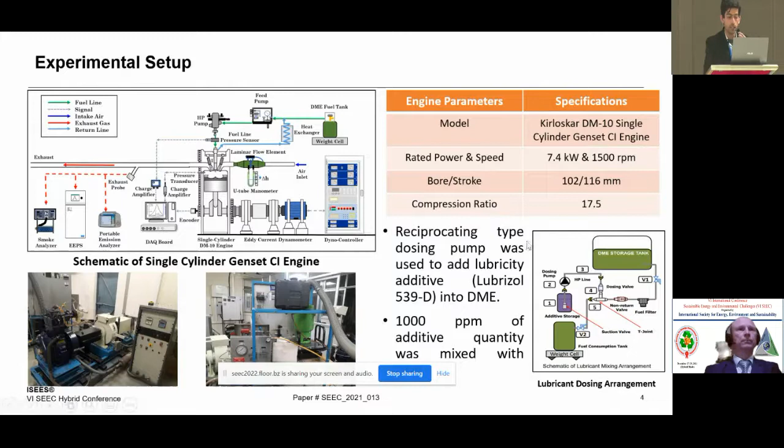These are the real images where you can see the modified fuel injection system and the DM10 Kirloskar genset engine, where we fire the engine on DME. So this is the arrangement for the dosing of the lubricant.

So these are the results where we can clearly see significantly less NOx and CO2 emissions in the case of DME for the entire load range, but higher HC and CO emissions at the lower load, while comparable HC and CO emissions at the higher loads in the case of DME.

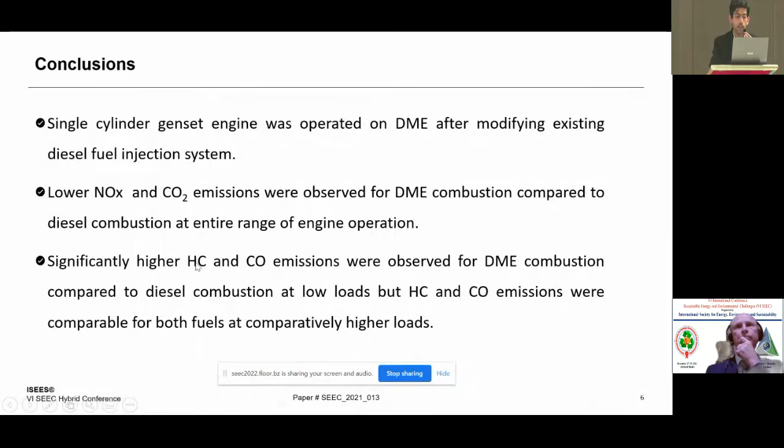So the conclusion of the study was: first we modified the existing diesel fuel injection system, and then we observed lesser NOx and CO2 emissions and higher HC and CO emissions in the case of DME, but comparable emissions for higher loads. Thank you.

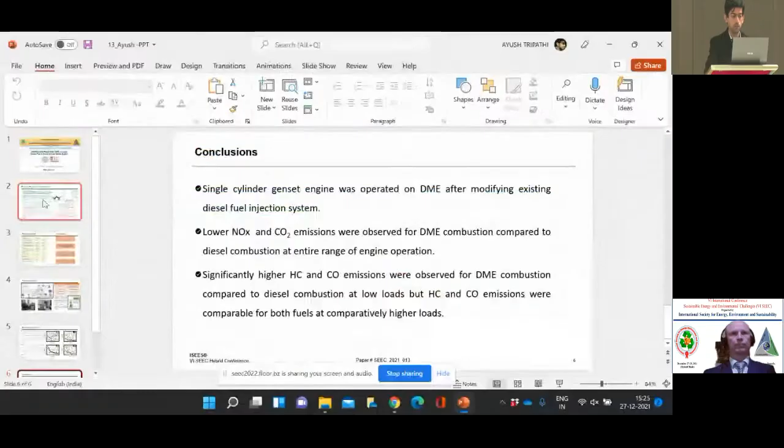Thank you for the presentation. Now, could you tell what can you do about these higher HC emissions? Can you find some diagnostics or some solution to reduce or eliminate the hydrocarbon emissions from DME conversion?

Yes sir, because at the lower load, HC and CO emissions are higher for DME due to its higher latent heat of vaporization. But we can compensate for it with the addition of glow plug type of things at the lower loads, so we can increase the in-cylinder temperature and pressure. From the literature it is clearly shown that in the in-cylinder temperature and pressure curve, the temperature of DME is lesser than diesel, so HC and CO do not oxidize to their other components, so we can modify it.

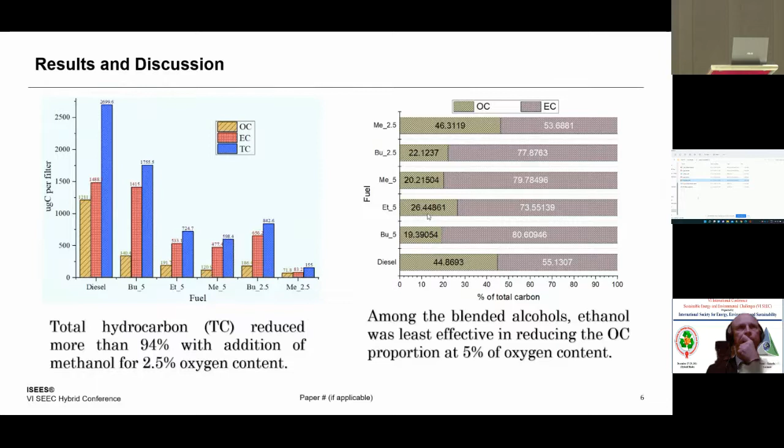Total hydrocarbon reduced more than 94% with addition of methanol for 2.5% oxygen. However, total carbon increases with change to higher order alcohol and increase in oxygen content. A similar trend for EC and OC has been observed. Among the blended alcohols, ethanol was least effective in reducing the OC proportion at 5% oxygen content.

In M2.5, 2065 nanogram per full filter paper was observed compared to 9135 nanogram per full filter paper of diesel fuel emission. However, it is worth noticing that increasing the percentage concentration of alcohol increases the PAH concentration in the CI engine. In M2.5, pyrene reduced by 38% and fluoranthene reduced by 5% of total PAH emission measured compared to the base fuel.

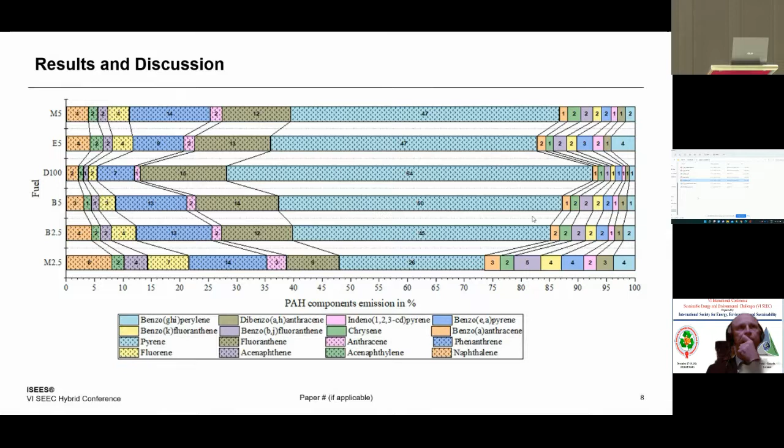Methanol diesel blend with 2.5% oxygen content showed the highest percentage of 10 out of 16 among the measured fuels. These 10 PAH compounds increased in proportion by inducing alcohol in diesel for 2.5% oxygen concentration, but seemed to reduce when alcohol was blended for 5% oxygen concentration, tending to reach a composition nearby that of diesel PAH emission on intake. M2.5 had given the best emission in terms of EC, OC and measured PAH compounds.

This could be attributable in part to the dilution of aromatics and the molecular structure of methanol. B5 had been calculated as the lowest and E5 has the highest toxicity fuel among the tested fuels.

Total measured PAH emission of E5 was 45.2% and 10.11% lesser than diesel and M5 respectively. However, toxicity potential of E5 was 14.4% and 14.75% higher than diesel and M5 respectively. Thank you.

Can you highlight what chemical components are responsible for this higher toxicity potential? Basically sir, benzene, pyrene, and dibenzopyrene were the main components which were responsible for this higher PAH toxicity level.

Can you tell me exactly what is the basis of selecting E5 and all those things? There could be E10, so why did you select E5 and so on? Yes sir, so actually we have selected it based on the amount of oxygen content in the blended fuel.

So here it is not like we have blended 2.5% of ethanol or butanol in the diesel. What we have done is we have calculated the amount of oxygen based on mass in the blended fuel and then blended it accordingly. It is reported in previous literature that the amount of oxygen present in fuel can have good effects on polyaromatic hydrocarbons and elemental carbon and organic carbons.

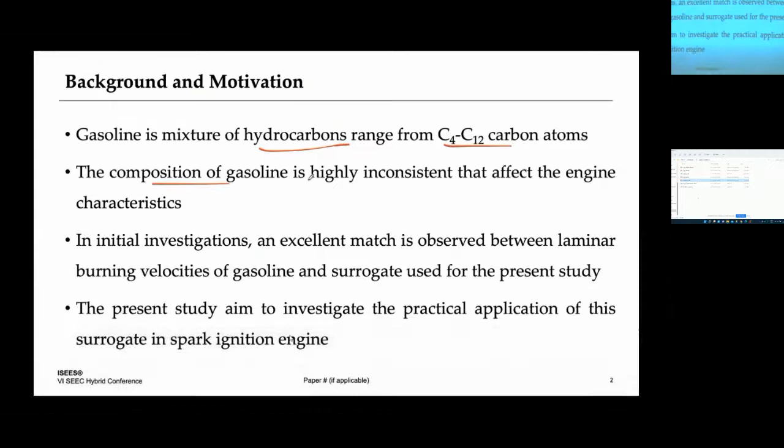Starting from the background and motivation: gasoline is a mixture of hydrocarbons, mainly alkanes and aromatics, ranging from C4 to C12 carbon number. The composition of gasoline is highly inconsistent, which affects the engine characteristics, mainly performance, combustion and emission.

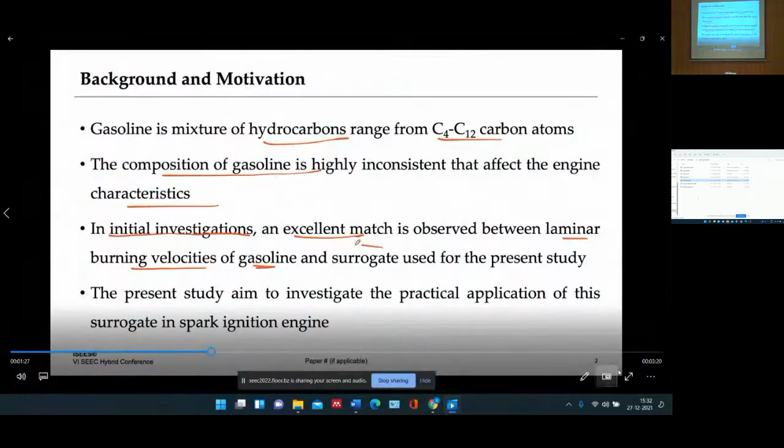In initial investigation in our lab, we found an excellent match between the laminar burning velocity of gasoline and the proposed surrogate used for the present study. The main aim of the study is to investigate the practical application of this surrogate in a spark ignition engine.

The methodology starts with the formulation of the surrogate. We then tested that surrogate in a 3-cylinder, 4-stroke, water-cooled spark ignition engine, and the emissions were analyzed with a testo gas analyzer. Here is the diagram of the experimental setup.

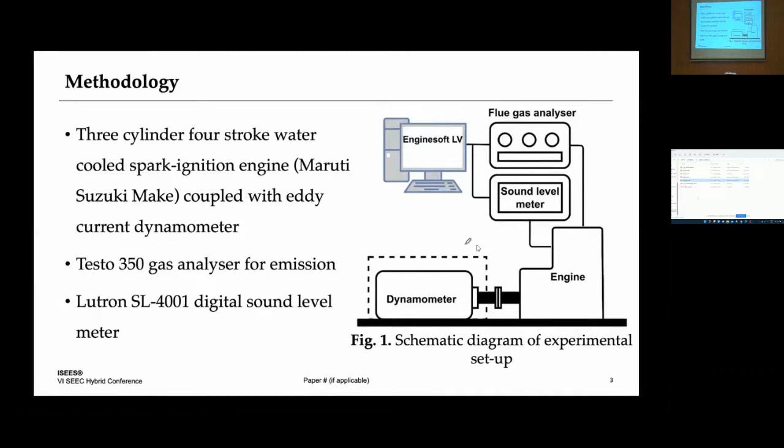In the results and discussion, we found that the gasoline surrogate performed better in terms of combustion characteristics like cylinder pressure and heat release rate. We got a higher heat release rate from the gasoline surrogate. The reasons behind this are the higher H/C ratio and the higher octane number of the gasoline surrogate.

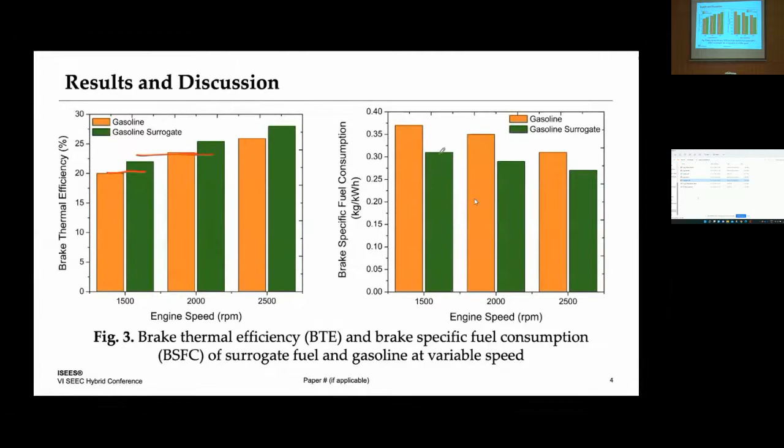The next point is thermal efficiency and brake specific fuel consumption. In terms of performance, the gasoline surrogate is also better, showing higher brake thermal efficiency and lower brake specific fuel consumption.

In terms of emissions, carbon monoxide is lower. However, due to higher cylinder pressure, higher heat release rate and in-cylinder temperature with the gasoline surrogate, the NOx emissions are slightly higher with the gasoline surrogate. So in short, we conclude that we can use this particular surrogate in place of gasoline.

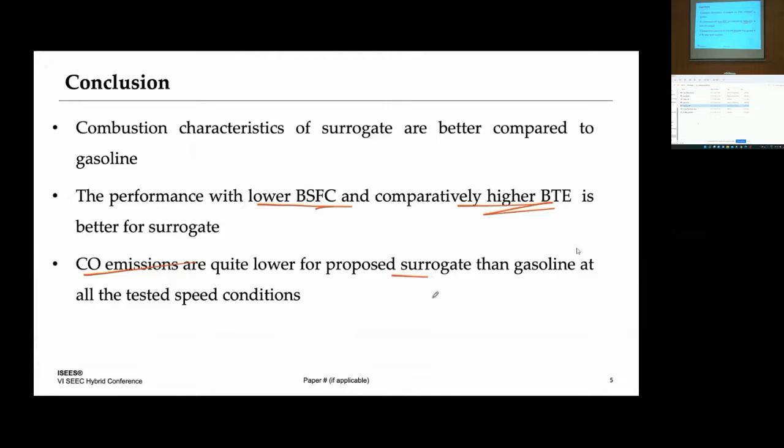Did you compare your results with results available in the literature? We compared the result with gasoline, not with the literature. Initially we performed the laminar burning experiments. We compared our results with gasoline, but not with the literature. This is a part of the work.

We tested different aromatics in our previous study on diesel engine. Aromatics are somehow important for the propensity of the fuel, but at the same time they increase some emissions like PM emissions. Similarly in gasoline they are required, so we have to find out which aromatic is good and which is not, and remove it as needed.

Which kind of engine have you used, was it SI or CI? SI. Initially we tested a different aromatic in a diesel engine, but this one is with SI. Okay, thank you.